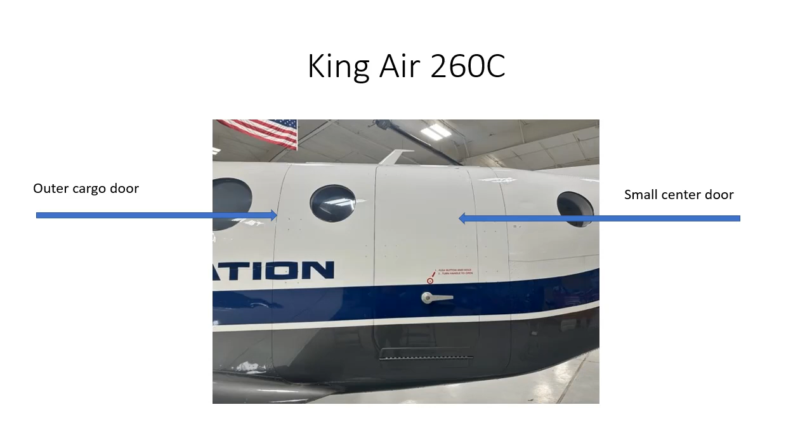Here we look at the exterior of the door. Notice there are actually two doors: a small center door, which we're familiar with from the other King Airs, and this outer cargo door. Follow that line around and you'll see it's pretty wide. Compared to the small center door, whose opening gap is around 16 inches, this cargo door is a lot bigger, which makes it much easier for us to manipulate the loader and sled system to get the patient in and out of the aircraft.

This is the inside look of the door. It looks very familiar. We have the center door there with the silver handle and push button. That hasn't changed much, but we're not seeing the 4 greens and a red anymore. There's now 7 reds, 3 on each side of the door and 1 behind that center step. We'll take a better look at that in a second. Also, the blue arrows show access points, the yellow and black handles used to open up the main cargo door. I want to reiterate that you cannot open the cargo door if the small single center door is open. We can only open one or the other.

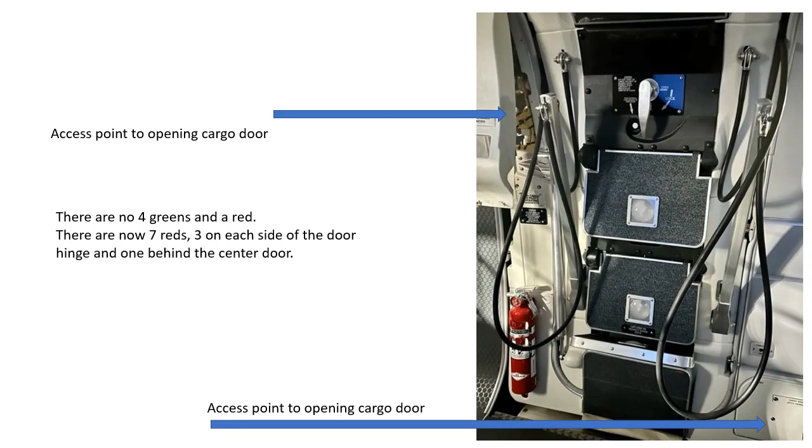We mentioned there are now 7 reds visible at once; there's 3 reds on each side of the door, though it looks more like orange in the picture. Then we turn around and have another red behind that center step in the center door. We'll take a look at that in a second.

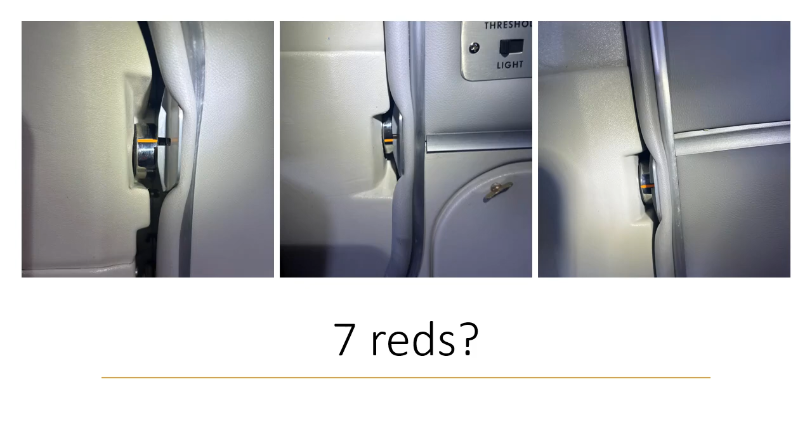When we open up that center door to check the final 7th red position, we may feel like the handle's closed properly, but the pin is not in that red circle. So one thing we have to make sure of when we lift up that center door step we stand on on the way out, is that we confirm all 7 reds before telling the pilot. Here, the one on the left is not fully closed properly, so it's important for us to check that.

As mentioned earlier, the small door opens the same as all the other aircraft. It's a pretty simple process. It's got a very small cross diameter, less than 16 inches, still big enough for you to get in and carry your equipment in and out. There's enough space to get the sled out, but you have to turn it on its side, you can't lay it flat. Obviously, when we have a patient on it, we're going to have to close this door and then open up the cargo door. We'll get to see lots of pictures of that and some video footage.

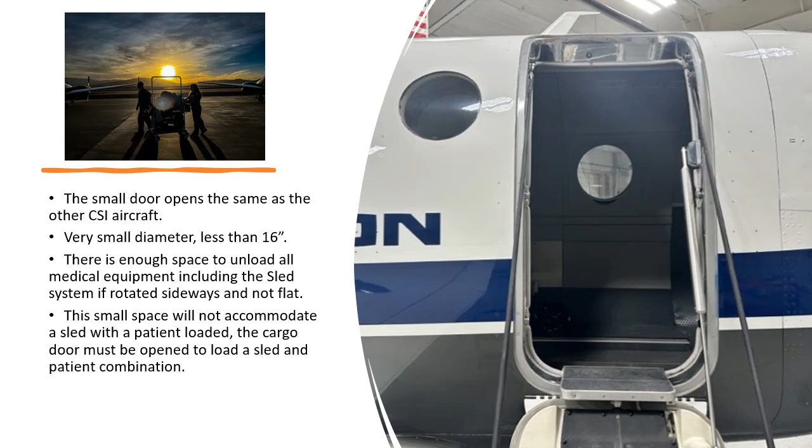Here we can see the interior view. The center door has been opened to the outside, but notice in the 10 o'clock and 5 o'clock positions there are a couple of plastic covers that we will open up with these little locking key mechanisms you'll see later in the picture. That allows us access to open the cargo door. Again, the center door, the small door, has to be closed first before we can open the cargo door.

In this particular picture, we've got the full cargo door open, and you can see the single small door is being closed. On the top right, that yellow handle has that little access panel door open, which was one of the mechanisms used to open the cargo door. There are 2 latches or levers, yellow and black, that we open to open the cargo door, and they can be opened in any order. There's no particular fashion to open them.

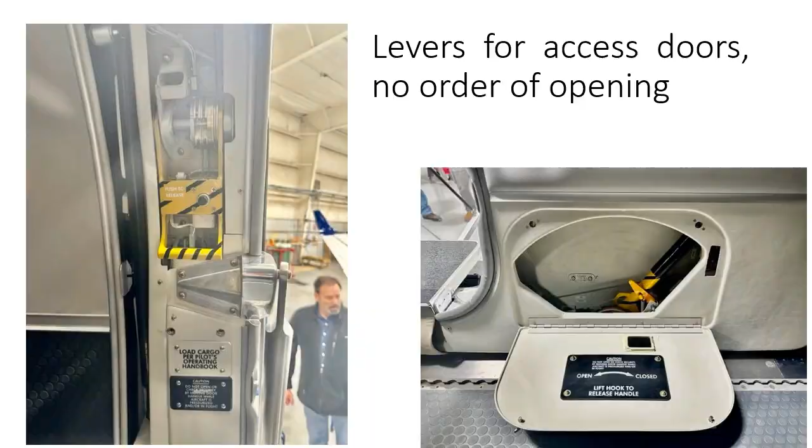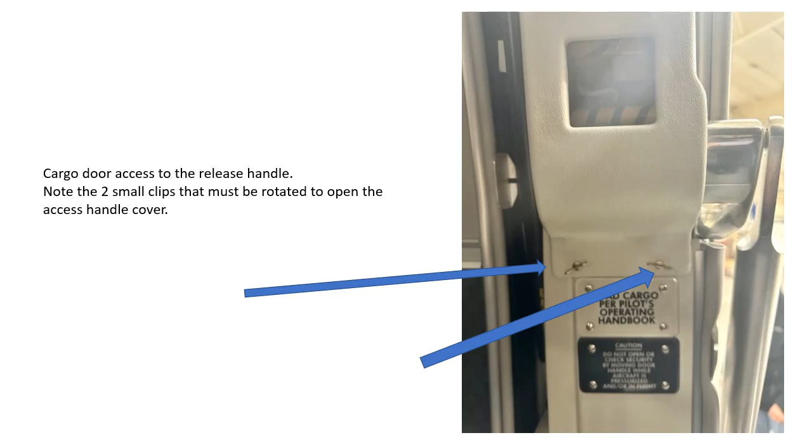Both of those access locations have plastic covers with small clips that must be rotated to open up and gain access to the handle. Once those are popped open, now we have access. We can open up the cargo door by lifting this handle and pushing the black button, where the other one is lift that little orange hook and pull the handle to the left, and then the door will be able to be open.

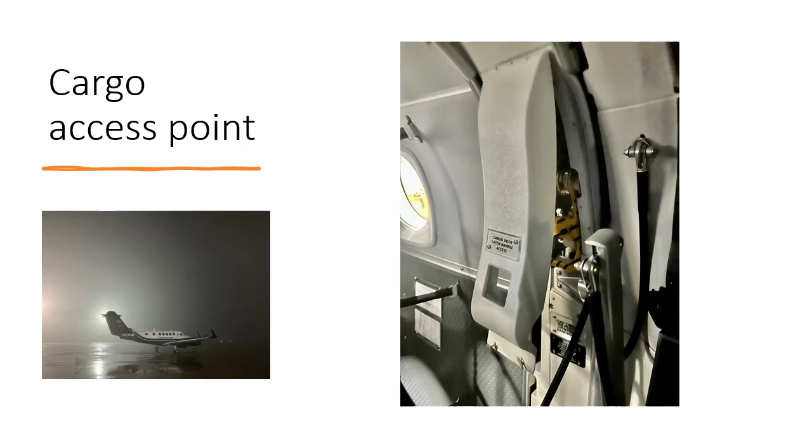Here's one of those access points that we talked about earlier. There's that plastic cover, you can already see the clips have been released. Now we can visualize that yellow-black handle. Here we have a closer view of that plastic cover being lifted out of the way. As it says, push to release, that's that black button there, and then just raise the handle. It doesn't take any effort.

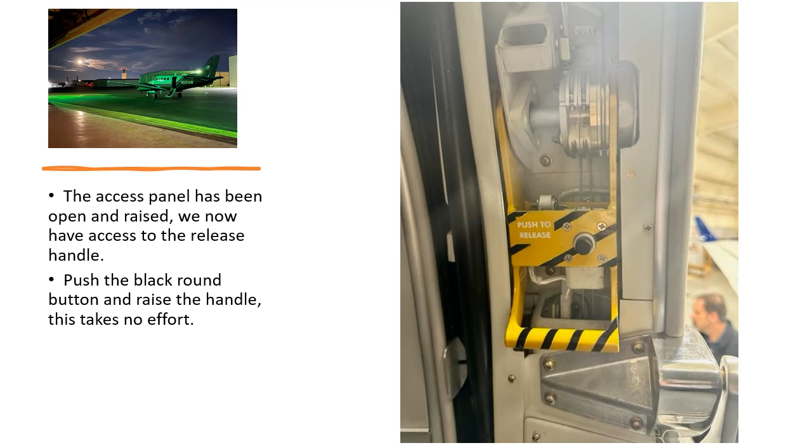And then don't forget to do the other one that's down on the bottom by the floor, which we'll get to see here in a little bit. It doesn't take any effort to open up these handles.

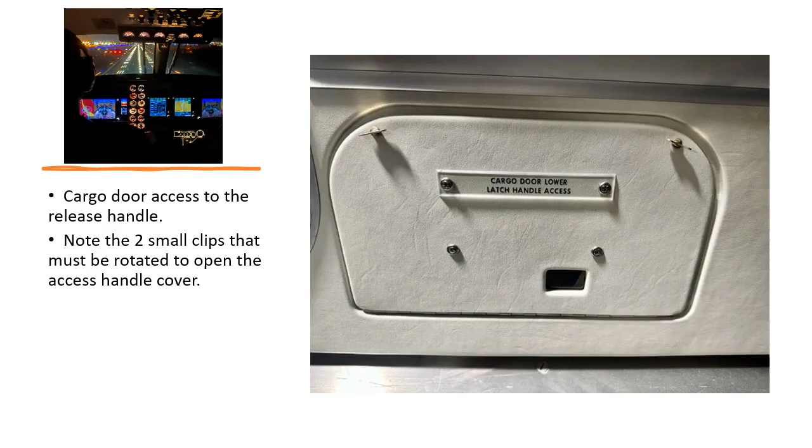And here's the other access panel for the cargo door that's down to the floor. Notice again the two small clips. Rotate the clips, we now have access to that lever and that hook to open up the cargo door. Here we get to see again the access panel open. There's our hook, move it to the left, open up the door.

So in this picture, the door is fully open. Understand it's close to a 5-foot drop if you were to fall out of the airplane. There are no steps, there is no ladder. The ground will stop you from going any further. So we don't want anybody jumping out onto the ground, because you could roll an ankle, hurt your knee, hurt your back, and so on.

Understand, once the cargo door is open, the crews are committed to the positions that they are at. In other words, if you're in the aircraft, the only way to get out is to close the door, open up the center door, climb through the center door, close the center door, and have somebody reopen the cargo door.

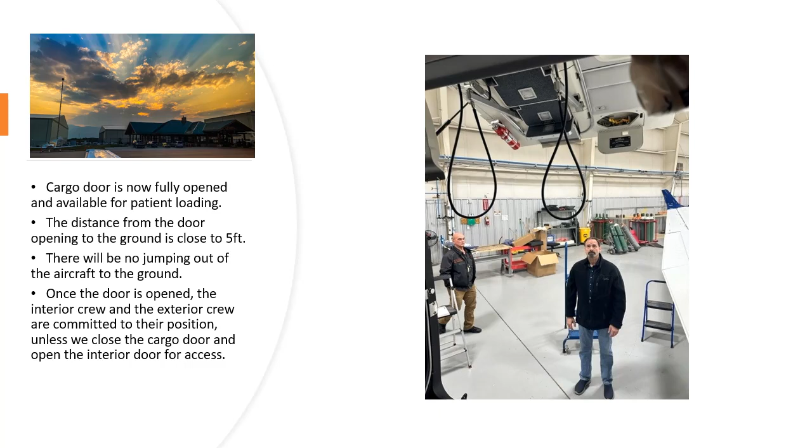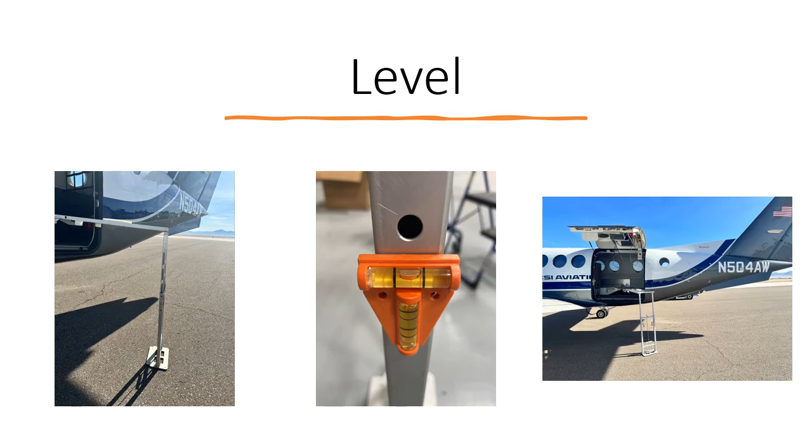As you can see in this position, the cargo door is open, loader's extended in the correct position, and we've even added a little level, which is that center picture there - it's called a line level - and the bubble needs to be in between the two black lines. That tells us we're 90 degrees, or perpendicular to the ground. This is our safe operation of loading the patient onto the loader from the gurney to the sled.

We need to be really careful when we close the door to avoid slamming. When we slam the door, the emergency oxygen mask will drop out of the ceiling. So you will see when you get to play with this, it's a delicate close - it doesn't require much effort, you can almost just push it closed.

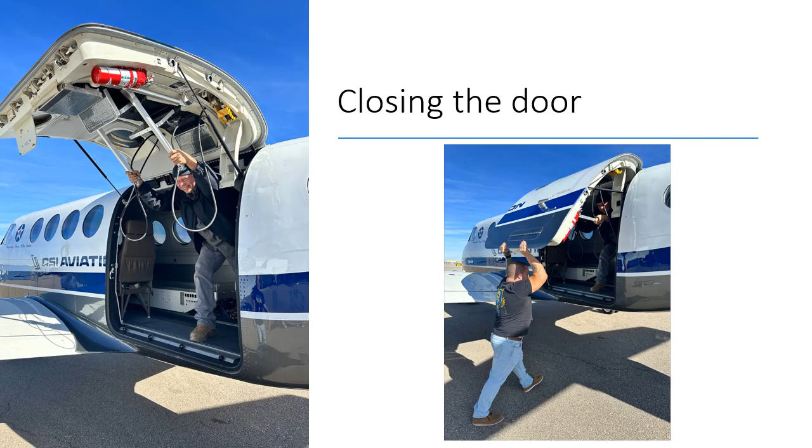Okay, so we closed the cargo door. How do we get back in? Well, we need to open up the center door to climb back in. Then once we close the center door, we can get on our journey and fly to our destination.